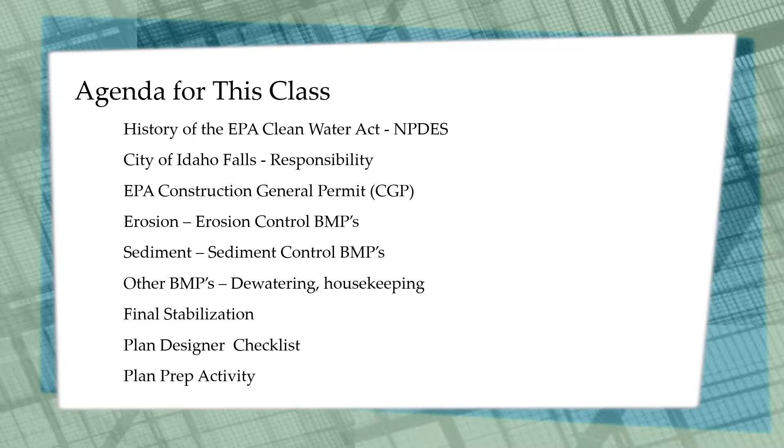Our agenda for this class is to briefly cover the history of the EPA's Clean Water Act and the National Pollution Discharge Elimination System. We'll talk about the City of Idaho Falls and their responsibility as it pertains to the Clean Water Act, and go over the EPA's Construction General Permit briefly. We'll discuss erosion control BMPs, sediment control BMPs, various other BMPs, and final stabilization. We'll look at a plan designer checklist you can use, and do a quick plan preparation activity. Our goal today is to give you tools to design effective and thorough erosion and sediment control plans for your projects in the City of Idaho Falls.

The City of Idaho Falls is required to do their part to minimize polluting of stormwater that discharges to the Snake River. Part of what the EPA requires is that the city have an ordinance pertaining to erosion and sediment control, and enforce those ordinances by inspection. The city doesn't have an option but to abide by the EPA's conditions as they pertain to construction. Failure to meet these requirements by the city is a violation of federal law.

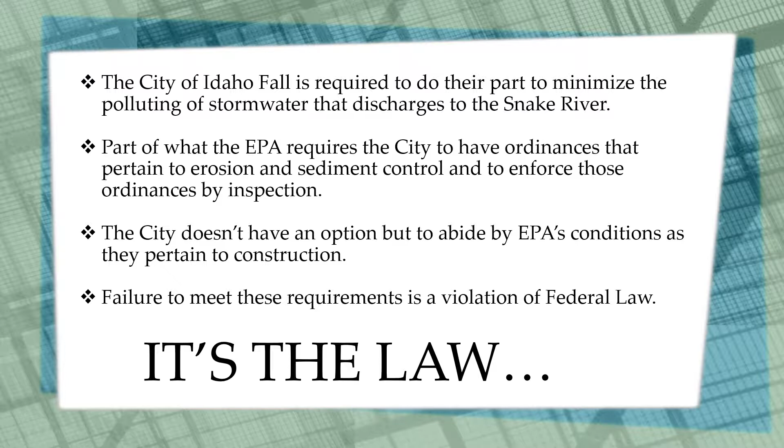So why is water quality important? When sediment load increases in a river, the water temperature increases. As that water temperature increases, aquatic plants die, aquatic insects decrease, leaving less food for fish. High temperatures also mean that certain species of fish can no longer thrive or survive. It also makes recreation less enjoyable.

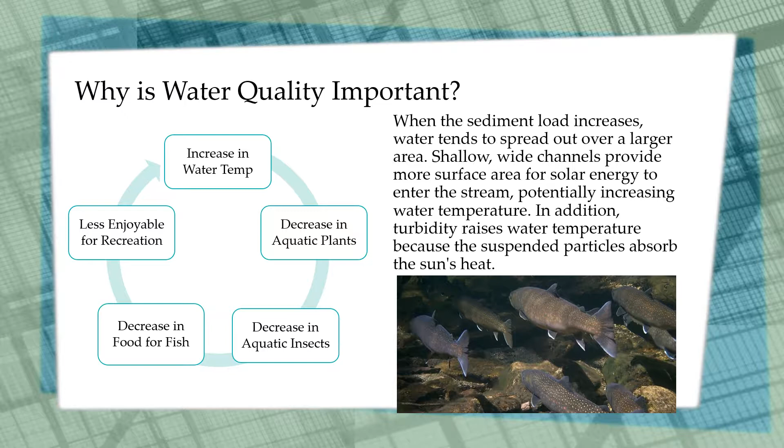So what does this have to do with you? Well, construction is the leading cause of sediment runoff in urban areas.

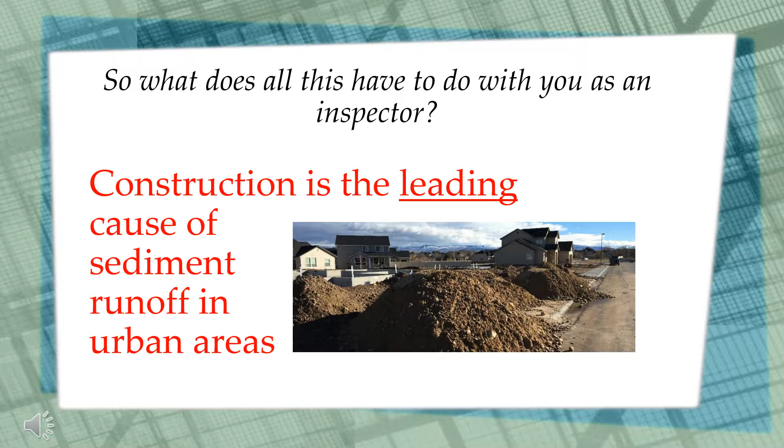The National Pollution Discharge Elimination System is under the EPA's Clean Water Act. The NPDES is over stormwater management for three sectors: construction, industrial or multi-sector, and municipal. Municipal pertains to cities that discharge stormwater to waters of the U.S., such as Idaho Falls. When you're working in Idaho Falls, you are complying with their requirements with the EPA as it pertains to stormwater management.

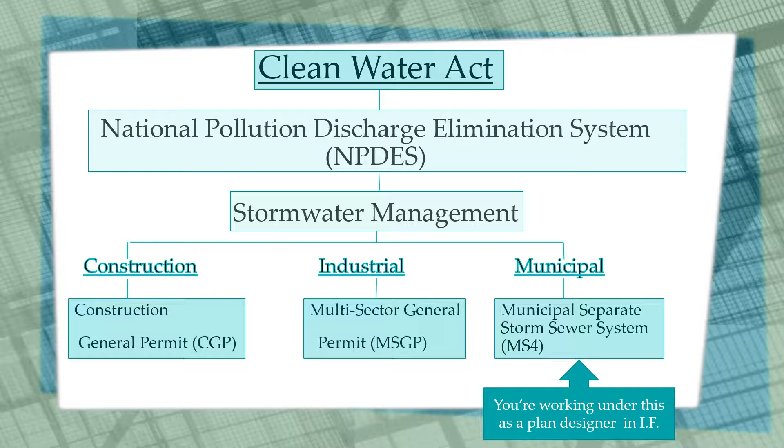Your project may also come under the Construction General Permit if it meets a certain set of criteria. We'll talk about that a little bit later in class.

The purpose of the City of Idaho Falls Erosion Control Ordinance is to protect stormwater, groundwater, water bodies, water courses, and wetlands from construction activities pursuant to and consistent with the United States Clean Water Act. Their goal is to manage and control the amount of pollutants in stormwater discharges, soil erosion, sediment discharges, mud and dirt deposits on public roads caused by or the result of construction activities.

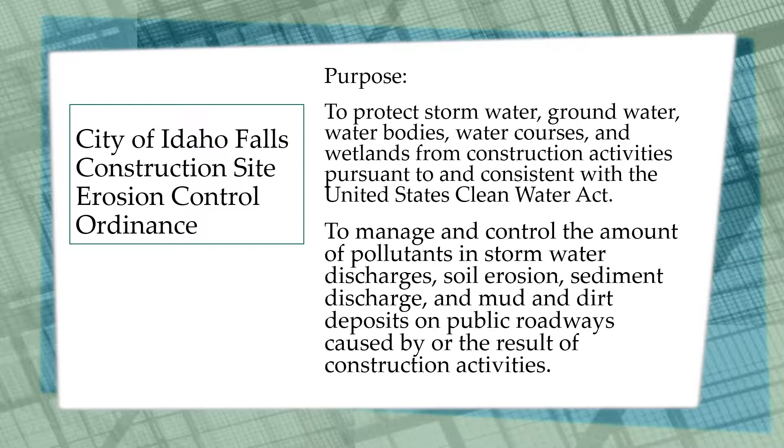The Idaho Department of Environmental Quality has jurisdiction over air quality for the entire state of Idaho. That includes regulating fugitive dust on construction sites. The Idaho State Rule requires that all reasonable precautions be taken to prevent particulate matter from becoming airborne, including dust from job sites.

If a contractor is not doing his part to contain dust on his site, the Idaho Department of Environmental Quality should be contacted. There are consequences for noncompliance. Failure to reasonably control fugitive dust can result in enforcement action, including monetary penalties.

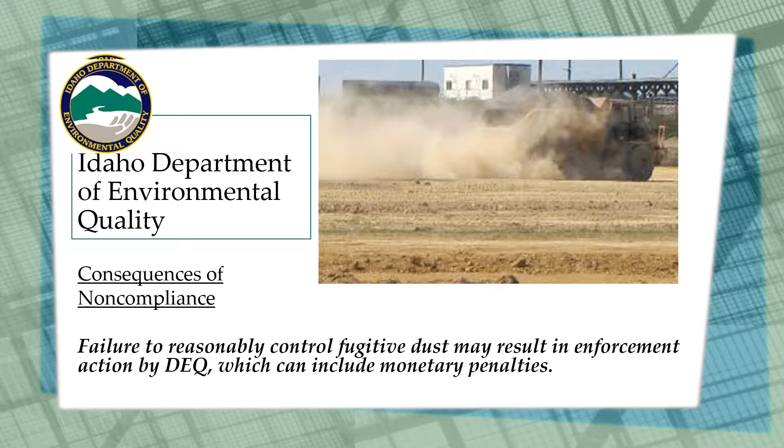As mentioned before, the EPA's Clean Water Act includes coverage over stormwater from construction activities through the Construction General Permit. The EPA's coverage through the Construction General Permit is for any construction project that disturbs 1 acre or more. It also applies to smaller projects that are part of a larger common plan of development. An example of a larger common plan of development would be a subdivision.

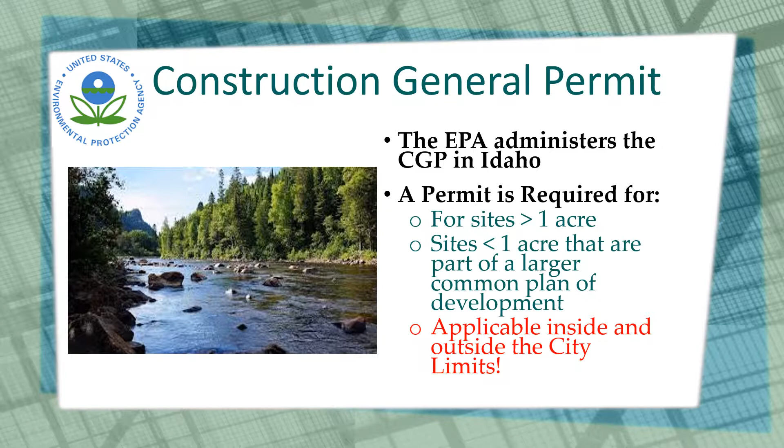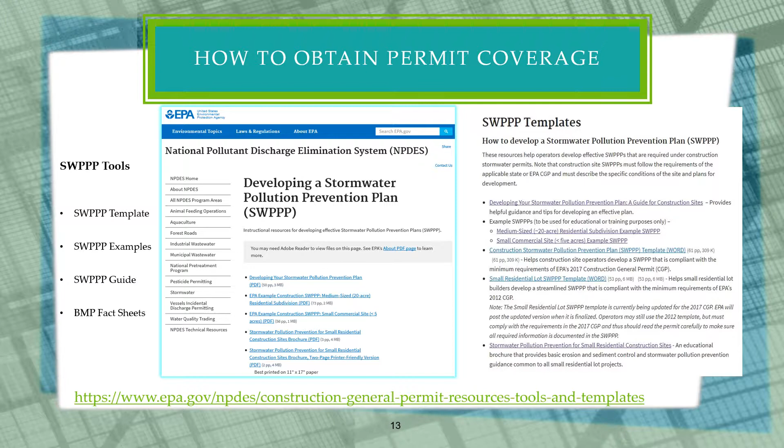The Construction General Permit is applicable inside as well as outside the city limits. If your project falls under the requirements of the EPA's Construction General Permit, you'll need to go to the EPA's website and look under SWPPP, or Stormwater Pollution Prevention Plan Tools. There are templates you can use, as well as example SWPPP plans and guides for preparing your SWPPP for your project.

Here's some important things you need to know. Your SWPPP must be developed prior to submitting a Notice of Intent, or NOI, for coverage on the EPA's website. The contents of your SWPPP will include the sequence and estimated dates of your construction activities.

It'll include a site map or site plan showing where your BMPs are and describing them. You'll have a description of your stormwater controls. You'll need to document your pollution prevention procedures, and document your procedures for inspections, maintenance, and corrective actions if needed for the BMPs you're going to install on your project.

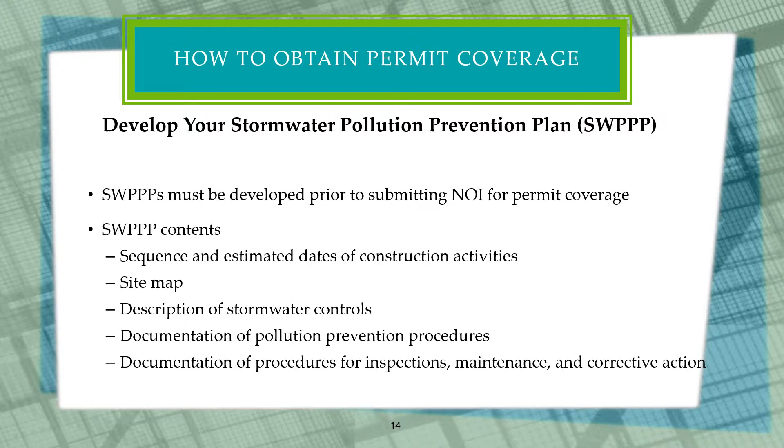Corrective actions refers to any sort of repairs to a BMP that are beyond normal maintenance. Self-inspection is required if your project has coverage under the Construction General Permit, once every 7 days or once every 14 days and after a 1/4 inch rain event.

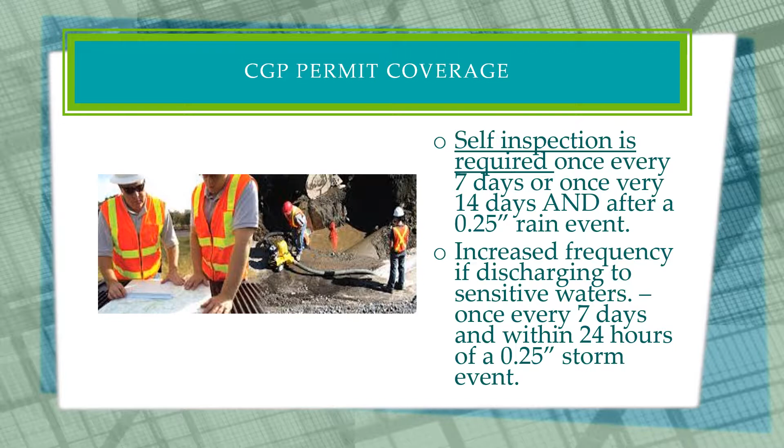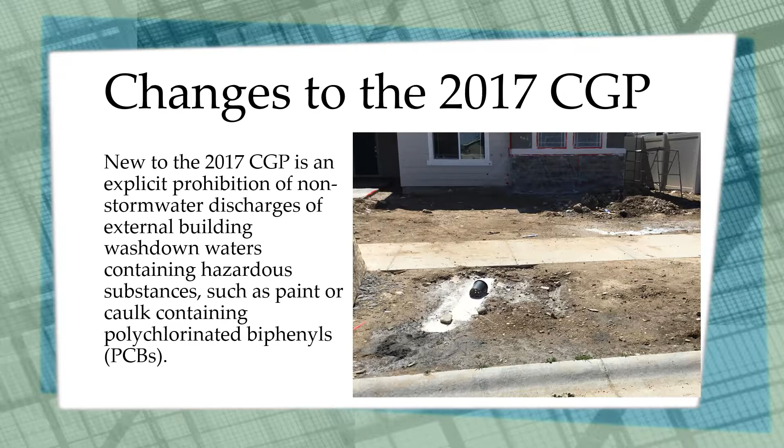The EPA's Construction General Permit is updated approximately every 5 years. The last update was in 2017. New to the 2017 CGP is an explicit prohibition of non-stormwater discharge of external building washdown waters that contain hazardous substances such as paint or caulk that contains PCBs.

Another change to the 2017 Construction General Permit is that construction operators must post a sign or other notice of permit coverage at a safe, publicly accessible location in close proximity to the construction site. This notice must also include information informing the public on how to contact the EPA to obtain a copy of the SWPPP for the project and how to contact the EPA if stormwater pollution is observed in the discharge. Your SWPPP document will need to include instructions to the contractor about this.

Okay, we've completed talking about the federal, state, and local requirements. Now we're going to go ahead and talk about the best management practices that you're going to need to incorporate on your project.

So just what are BMPs, or best management practices? BMPs are the methods, measures, or practices used to prevent or reduce water pollution, including but not limited to structural and non-structural controls, operation and maintenance procedures, other requirements, scheduling, and the distribution of your construction activities.

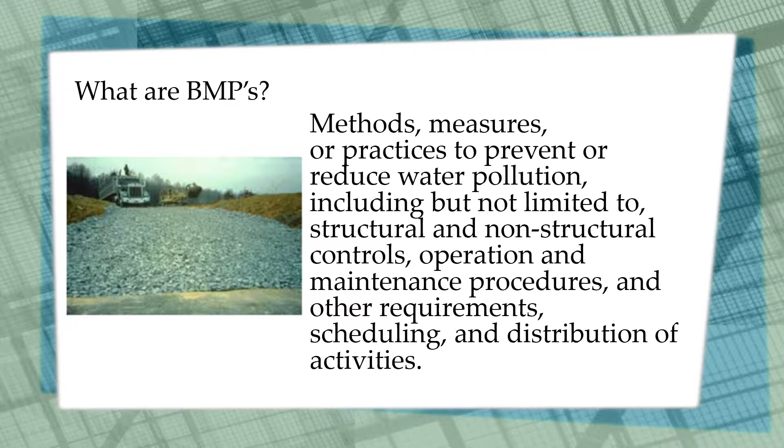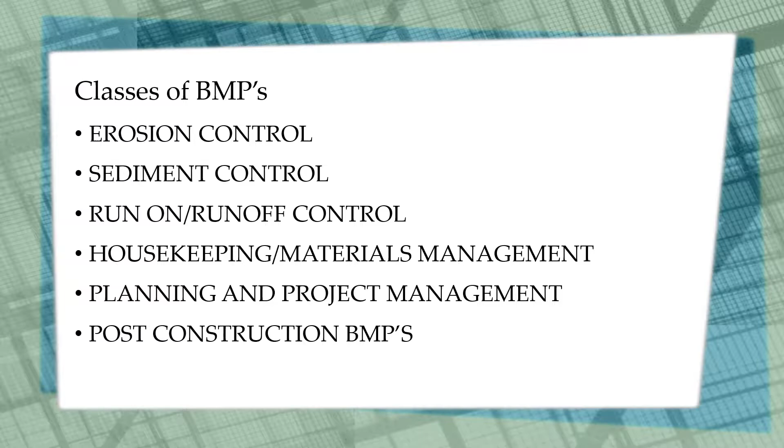The different classes of BMPs include erosion control, sediment control, run-on and run-off control, housekeeping and materials management, planning and project management, and post-construction BMPs. So before we talk about them, let's talk about why we need BMPs.

Erosion control is our first line of defense. If we can keep soil from moving in the first place, then we don't have to clean it up someplace else. Our goal is to prevent water from running across our exposed slopes and surfaces as much as possible, and to try and keep soil in place. If we don't have erosion, then we don't have to clean up sediment someplace else. This is a case of an ounce of prevention being worth a pound of cure.

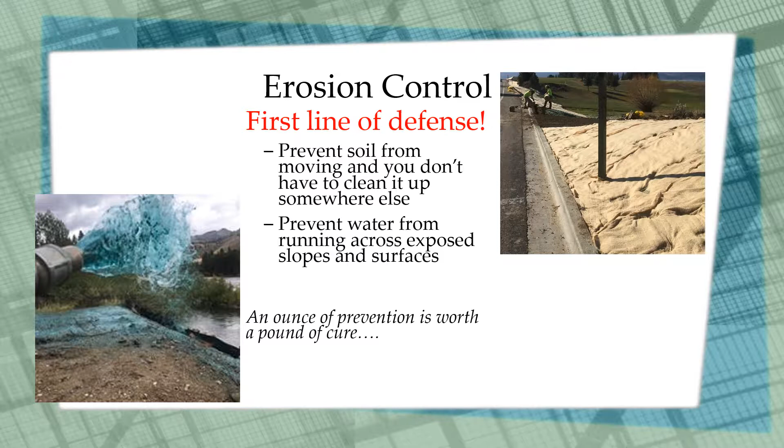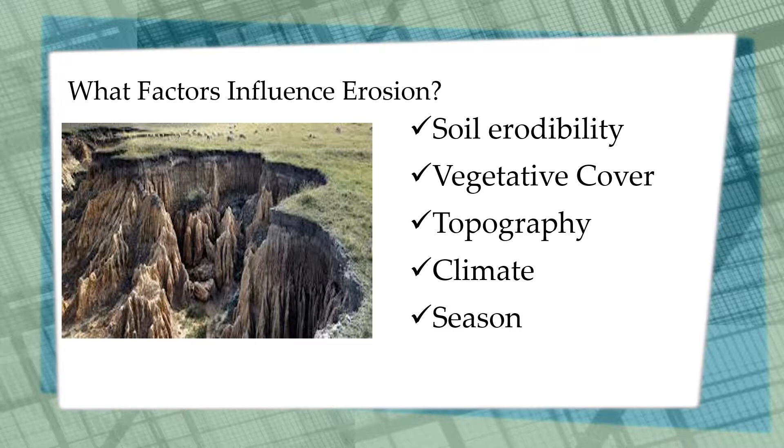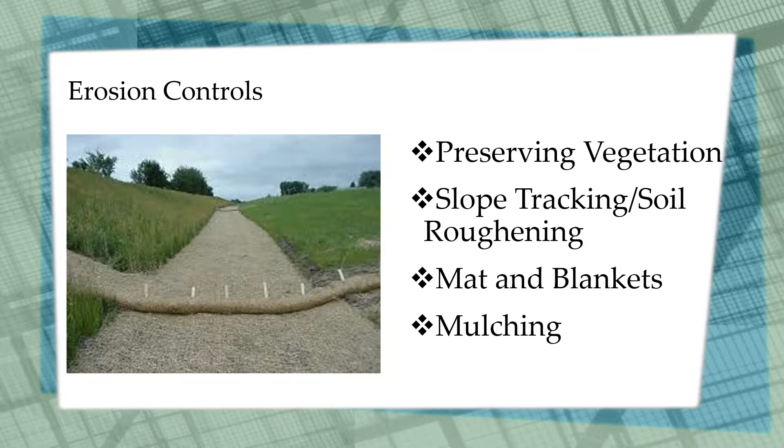Now we're going to cover the erosion controls that you might use on your project. The first one will be preserving vegetation. We'll go over slope tracking and slope roughening. We'll talk about mats and blankets and mulching.

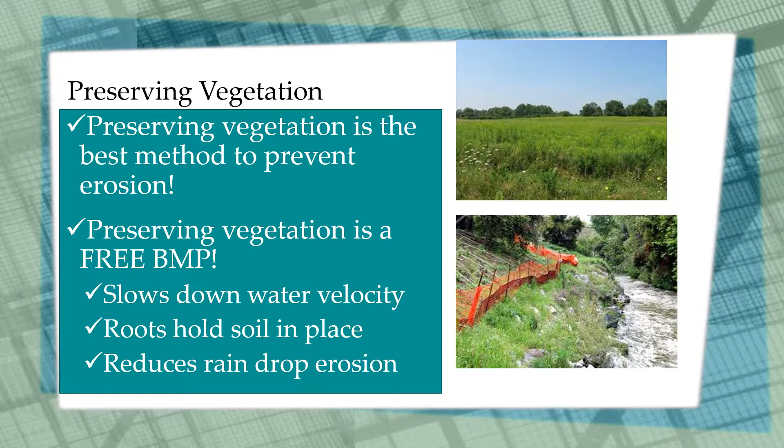The number one thing a contractor can do to minimize erosion is preserve existing vegetation. Preserving vegetation is a free BMP. It slows down the velocity of the water, the roots help hold the soil in place, and it also reduces raindrop erosion. So encourage your contractors to minimize disturbing existing vegetation.

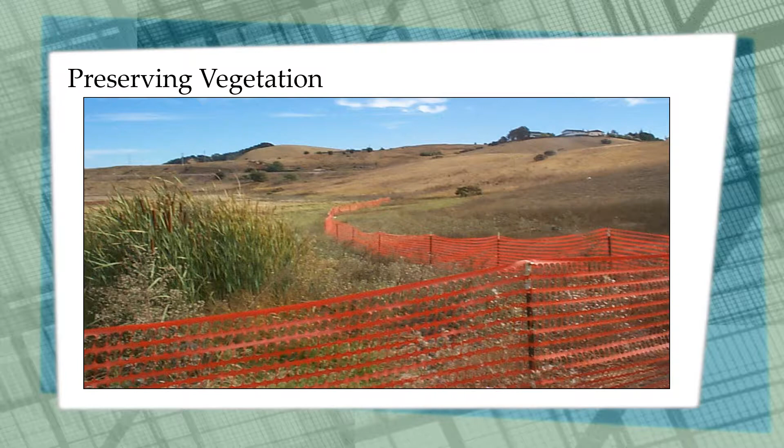Encourage contractors to provide positive protection for areas they want to keep undisturbed. Use construction fence to keep areas from being tracked over, reducing your sediment runoff from construction activities.

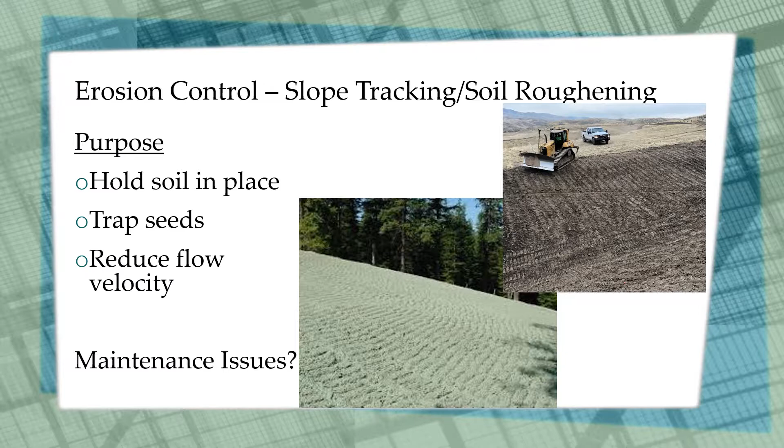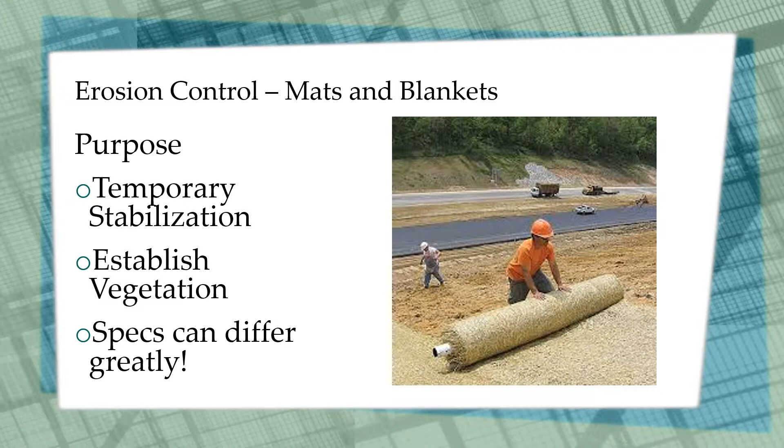The key to mats and blankets being effective is proper installation. Seed beds need to be prepared prior to the mats being installed. The mats must be installed from the top down the slope. The mats need to be staked in well all along the slope, and the mats need to be overlapped sufficiently so that there aren't gaps between them. And the most critical is that the mats need to have a really good contact with the soil.

So the slopes need to be graded prior to the mats being placed. If there are holes or large lumps in the slopes, then the mats, wherever those are, is where soil erosion will take place.

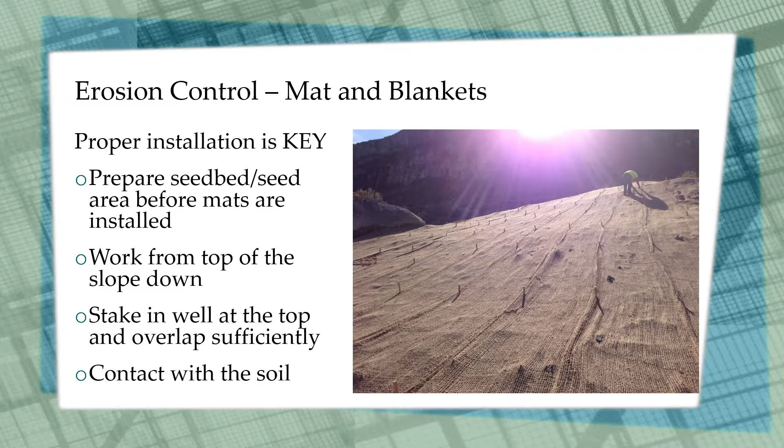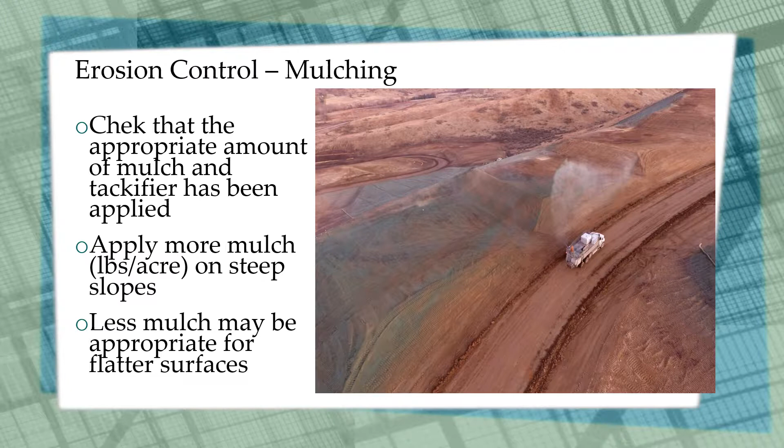Sediment control BMPs include stabilizing your construction entrance, fiber rolls and straw wattles, silt fence, check dams, and inlet and outlet protection.

Relative to erosion control BMPs, sediment control BMPs are generally about 50% effective. Erosion control BMPs are more likely to be 90% effective. Therefore, erosion control BMPs should be your first line of defense.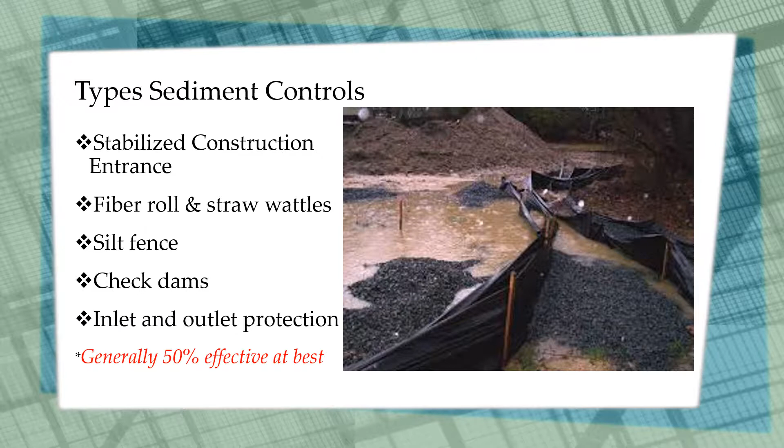A stabilized construction entrance is non-negotiable. It must be required. Make sure that the rock is 2 to 4 inch clean, crushed rock. Round river rock is not acceptable. The depth needs to be approximately 6 inches thick. The width needs to be 20 feet and the length 50 feet. And it needs to be replenished if the rock gets filled with mud.

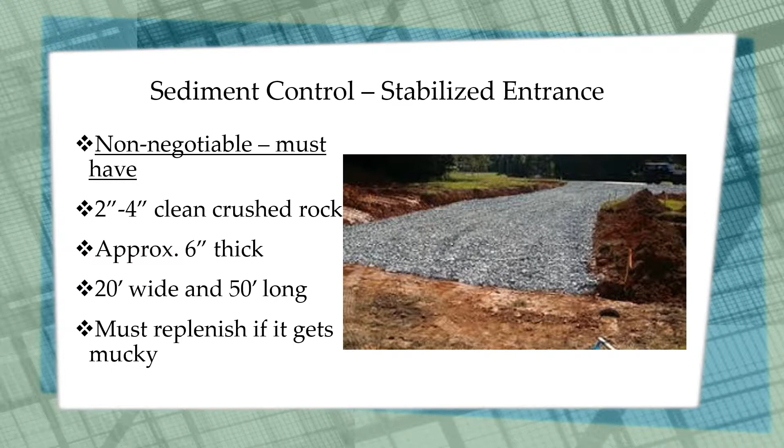As you're doing your inspections, make sure that these dimensions have been met and let the contractor know if the rock gets too dirty and needs to be replenished.

According to the EPA's requirements, track out must be swept the same day. So encourage your contractors to minimize track out, and if it does happen, to clean it up the day that it does.

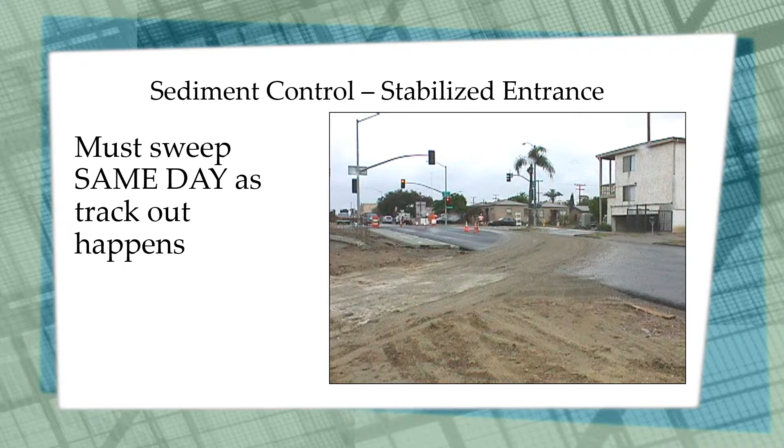Fiber rolls or straw wattles are an extremely versatile tool for sediment control. Their primary function is to slow down water and to trap sediment. They can be used for perimeter control, as shown in this picture. They can also be used along the toe of hillsides, as well as along contours of hillsides.

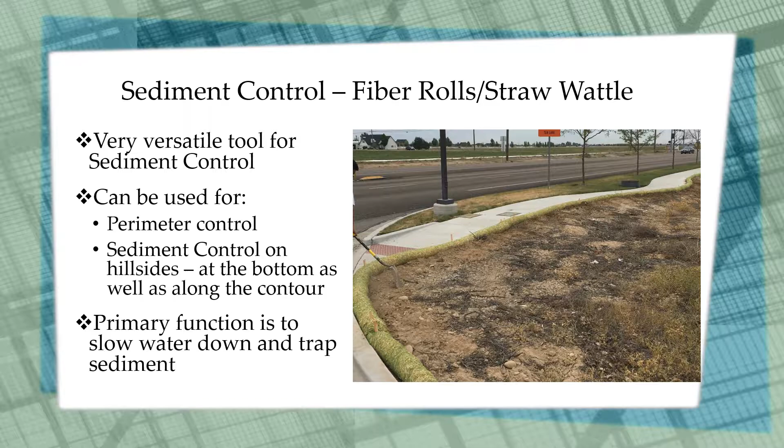Again, always make sure that you install fiber rolls along the contour. Make sure you overlap them sufficiently at the ends where they meet. Make sure you have very good contact with the soil for the entire length of the roll, and make sure that it's staked down properly, typically every 4 feet.

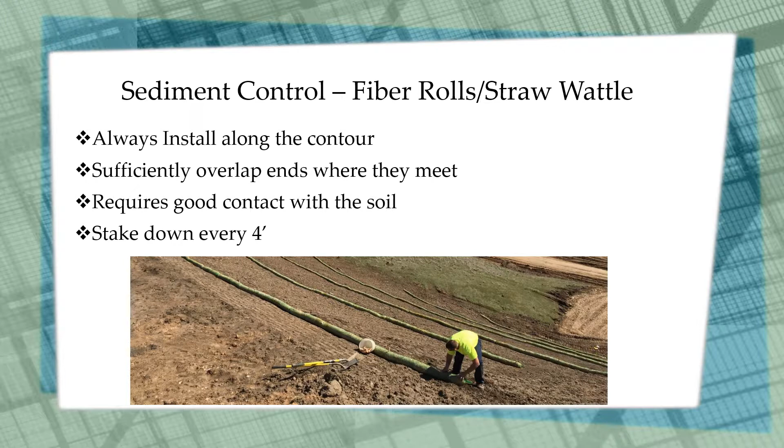Maintenance issues associated with fiber rolls and straw wattles include the fact that they're not very durable. They will need to be replaced if they get broken. Additionally, you'll need to muck out any sediment buildup on the back side of them if there's a storm event.

Fiber rolls are very useful, but their uses are limited. It's generally not very good to use them as inlet protection because they're light and they can float. They can be used as check dams for limited situations, but because they are fragile, they will deteriorate quickly.

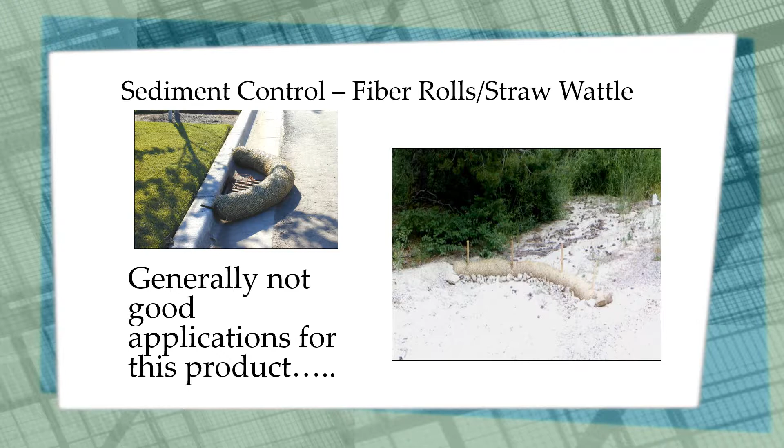Silt fence is probably one of the most common sediment control BMPs used. Silt fence works by ponding water and allowing sediment to settle out. Silt fence is good for use at the bottom of large exposed slopes, as well as a barrier around the bottom of stockpiles.

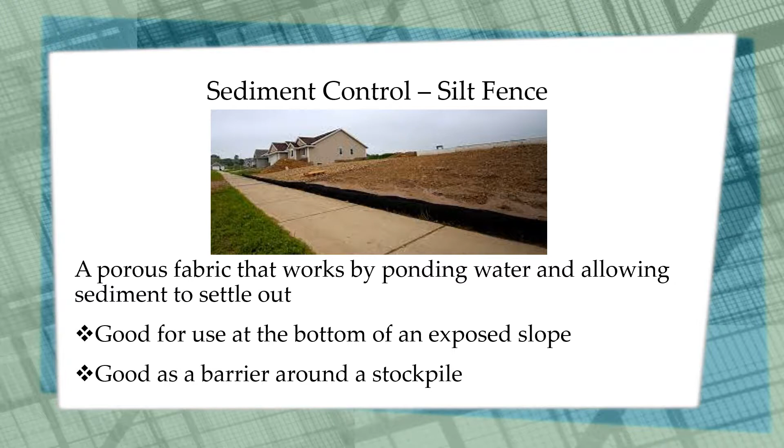Silt fence should never be used in high concentrated flows. It is intended to pond water. Silt fence is absolutely useless if it's installed improperly.

It's also really important that silt fence be installed at the same elevation or the same contour line. Installing it up and down a hill is absolutely useless.

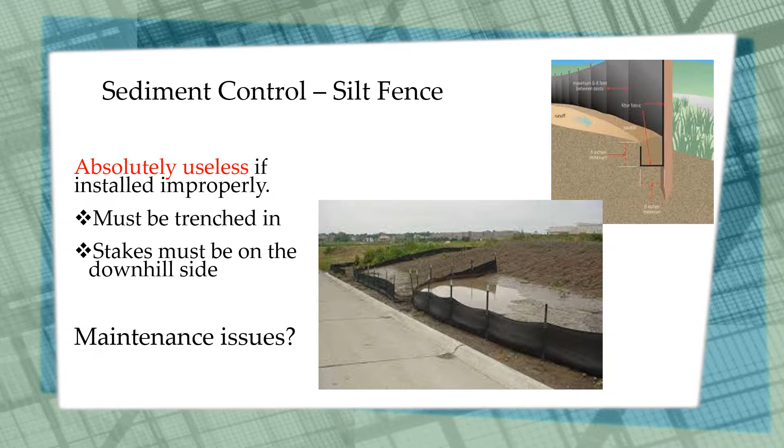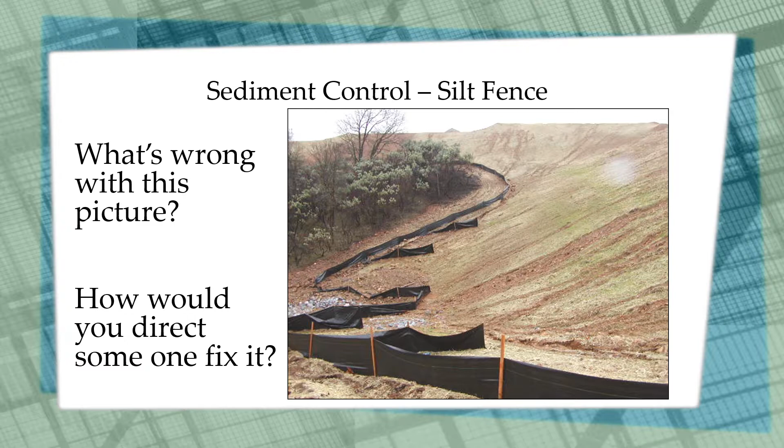On the left, about halfway up the picture, it looks like someone's tried to use the silt fence as a couple of check dams. This is the wrong application for silt fence. Silt fence is not intended to be used in concentrated flows.

Check dams are an excellent sediment control BMP to be used in ditches and swales. The primary purpose of check dams is to slow down the velocity of the water while ponding the sediment behind the check dams.

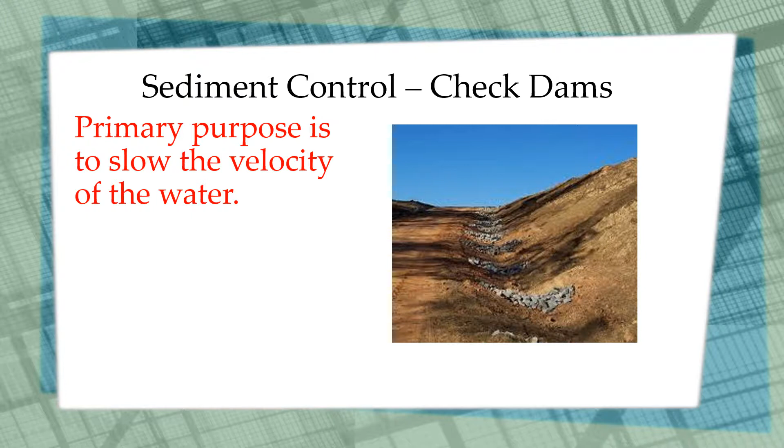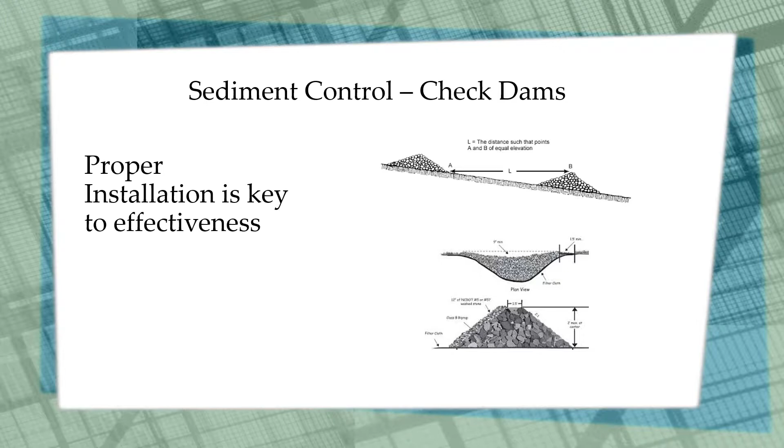Again, proper installation is key for the effectiveness of check dams. The elevation of the toe of the upstream check dam needs to match the elevation of the top of the downstream check dam. Also, the center of the check dam needs to be lower than the sides. Otherwise, water will quickly find a path along the sides and erode them.

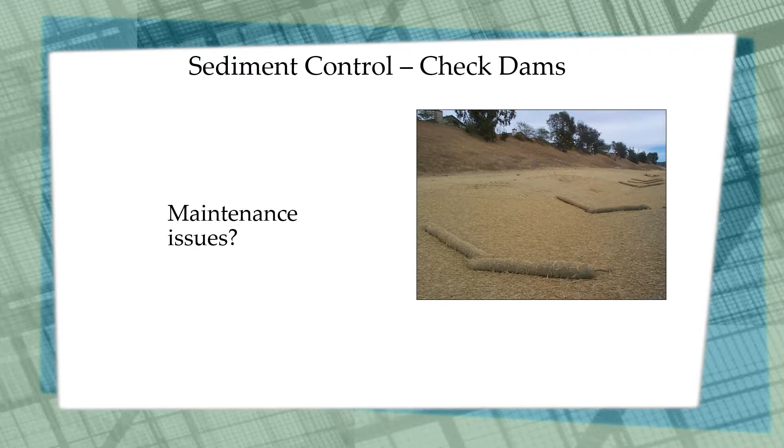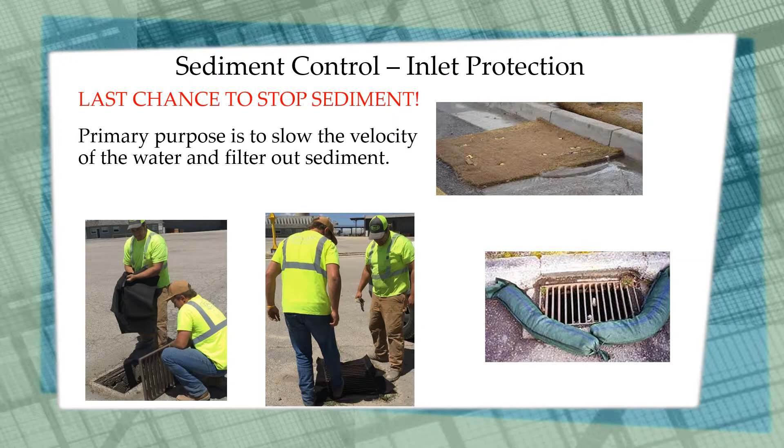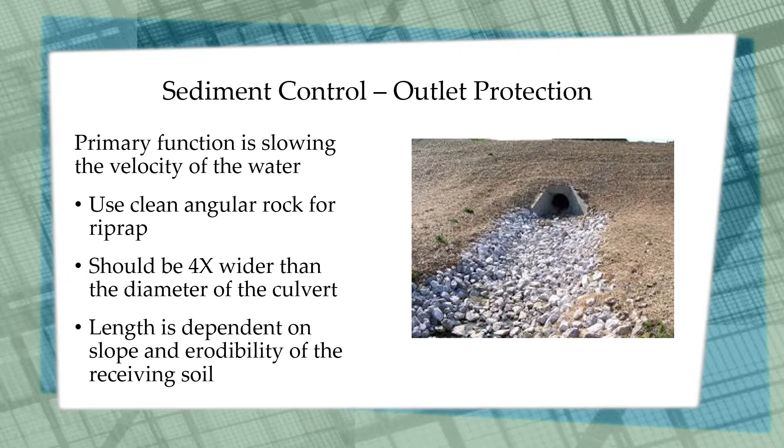If you do see the potential for run-on or runoff, consider diverting flows so that they go around your site rather than through it and picking up sediment. Also, install some sort of device such as straw wattles or a berm to keep water from running off your site, reducing sediment loss.

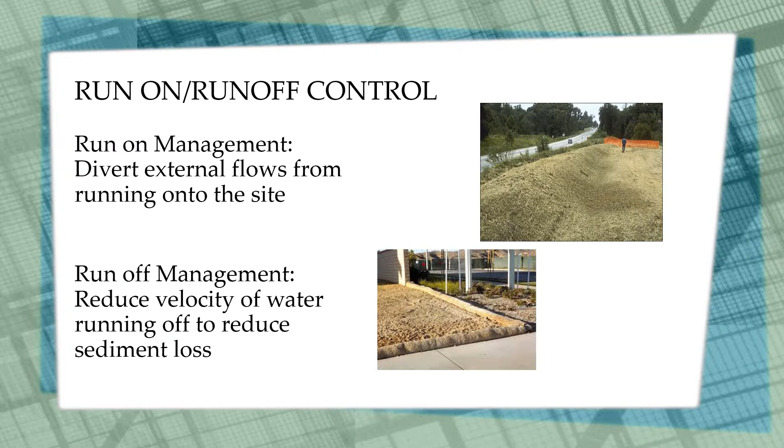Now we're going to move on to our next class of BMPs, which is housekeeping or materials management. This group includes debris containment, dust management, storage and proper disposal of toxic materials, and stockpile management.

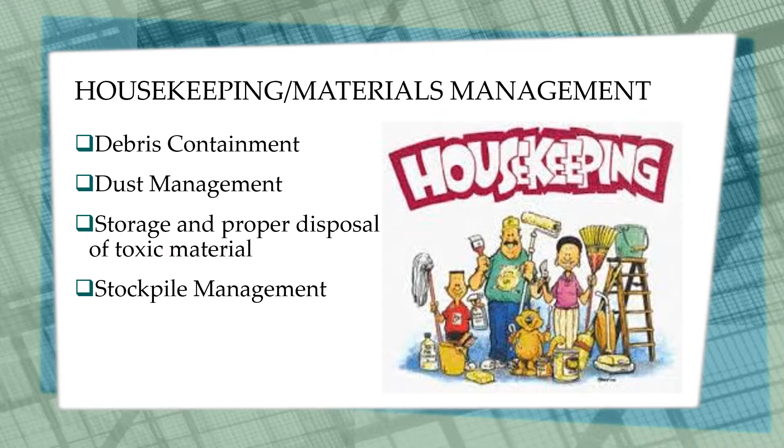Debris management is a big part of keeping a job site clean. Check to see whether or not the site has a debris container. Check to see that the size of that container is adequate for the project. If there's garbage overflowing, let the contractor know that he needs to have it regularly serviced. The new construction general permit states that all debris containers will be covered when not in use. This may not be practical all the time, but the contractor should have a way of covering his debris container if it's needed.

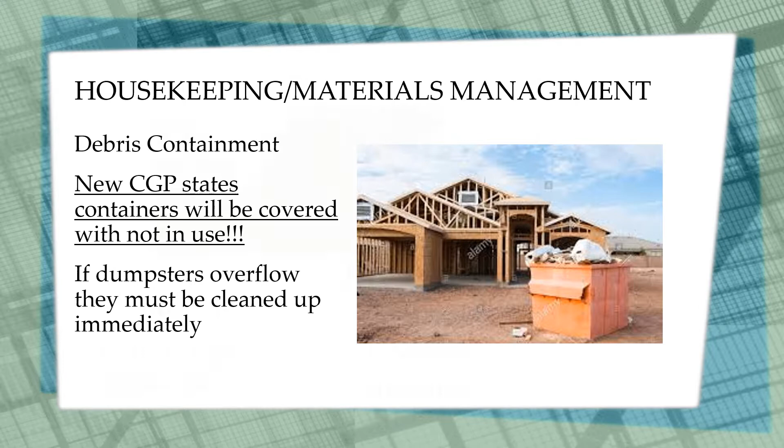Dust management is really critical for our job sites. Why is dust regulated? We have a lot of very fine silt particles in Idaho. Those silt particles are comprised of silica or glass. So the dust in our air is basically fine, tiny, sharp pieces of glass, which is extremely hazardous. As those fine particles are inhaled, they penetrate deep into lungs, causing lung diseases. They can affect people with impaired lungs as well. Not only is it a health risk, but it's also an air quality issue, and it's a nuisance. Make sure you specifically mention dust management when you're preparing your erosion and sediment control plan.

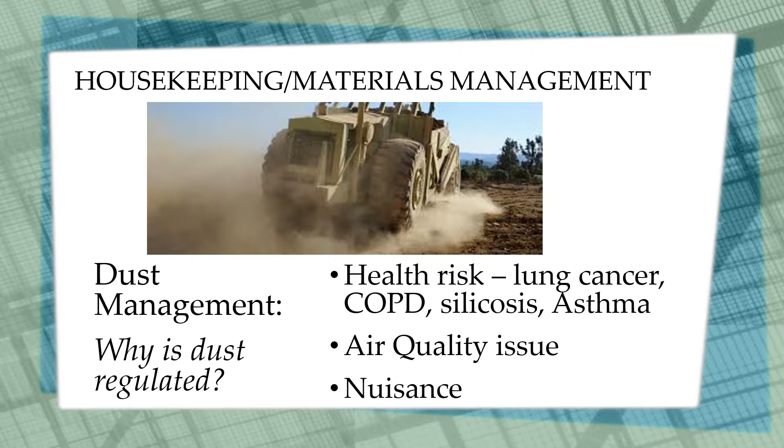Storage and proper disposal of toxic materials is often overlooked on job sites. If you see on a job site that there are toxic materials, let the contractor know that they need to be stored in a leak-proof container.

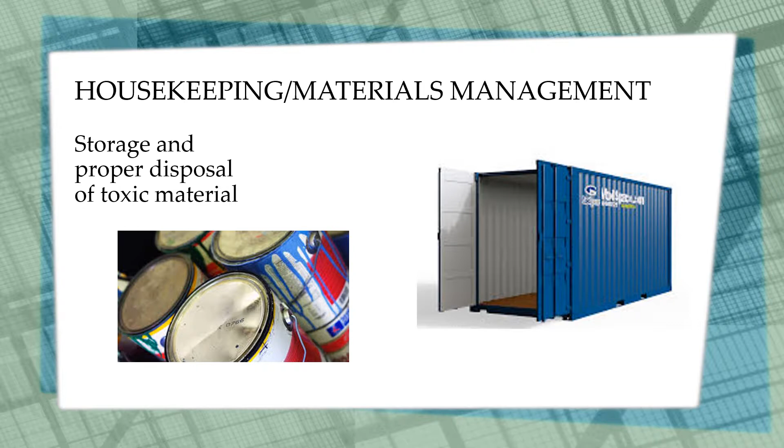Oil is considered a toxic material and needs to be stored properly. If a vehicle does require maintenance, make sure that the contractor uses drip pans or some sort of pads underneath the equipment while the maintenance is taking place. If there is a spill on site, direct them to clean it up immediately and dispose of that material properly.

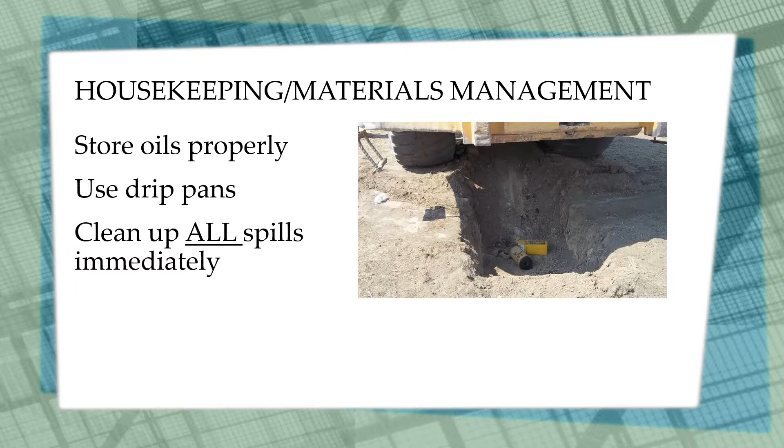Concrete washout is extremely toxic to any kind of aquatic plants or animals. Concrete washout must be stored in a leak-proof container. This can be as simple as digging a pit and lining it with visqueen and surrounding that with bales.

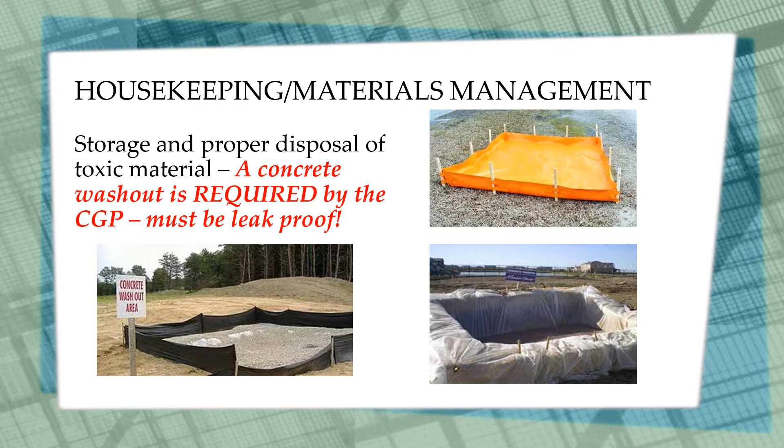When you're doing your inspections, make sure that the concrete washout is lined. It also needs to be signed very clearly so that subcontractors will use it. When you're putting your erosion and sediment control plan together, make sure you designate a spot for concrete washout and show a sign for it so that it's clearly marked and visible.

During your inspections, make sure you check to see that the porta potty is staked down to protect it, and make sure it's not placed anywhere near a curb and gutter or storm drain inlet. Check to make sure that the contractor has a spill kit on site, as that is required by the EPA's Construction General Permit.

Encourage the contractor to avoid fueling and maintaining vehicles on site if at all possible. Also remind them that they need to sweep their construction entrance daily to make sure that track out is not an issue.

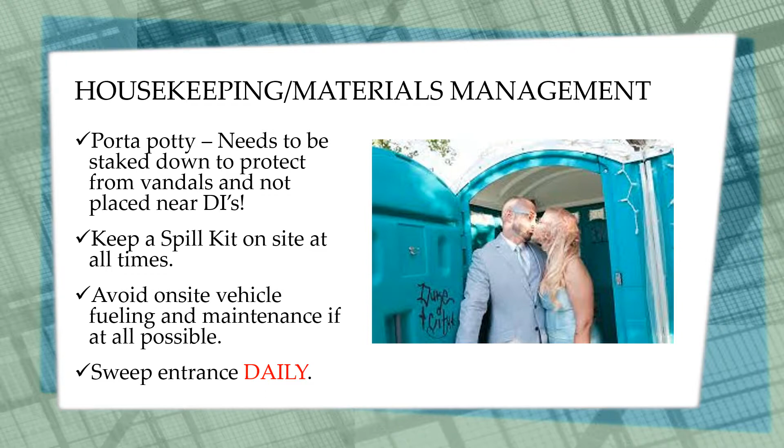Let your contractor know that illicit or illegal discharges are a big thing to the Environmental Protection Agency. An illicit discharge is defined as any discharge to the MS4 or storm drain system that is not composed entirely of stormwater, except for those discharges that are allowed under an EPA permit.

Allowed discharges are limited to fire hydrant flushing, landscape irrigation, wash water that doesn't contain any kind of soap, solvents or detergents, water used for dust control, and water used for flushing water lines.

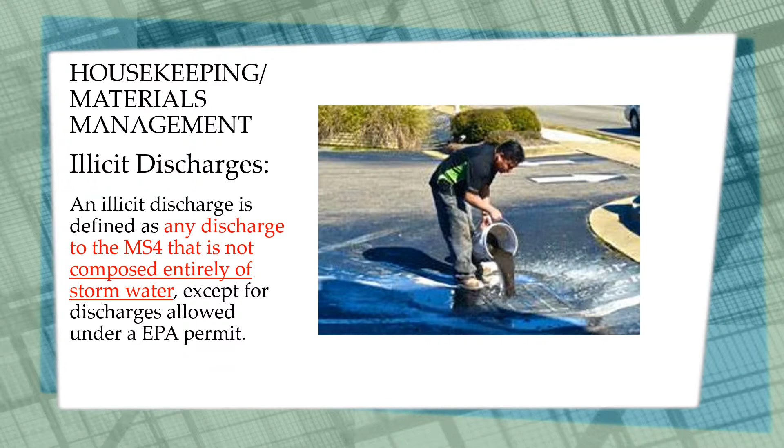Next is stockpile management. If a stockpile is going to be sitting unused for 14 days, it must be stabilized. That can be done through a variety of methods, either covering it with a tarp, mulching it, putting on temporary seeding, or applying straw and a tackifier. There's a lot of possibilities. But again, the critical thing is that it be stabilized if it's going to sit unused for more than 14 days. For dust control purposes, the top of the stockpiles should be flattened.

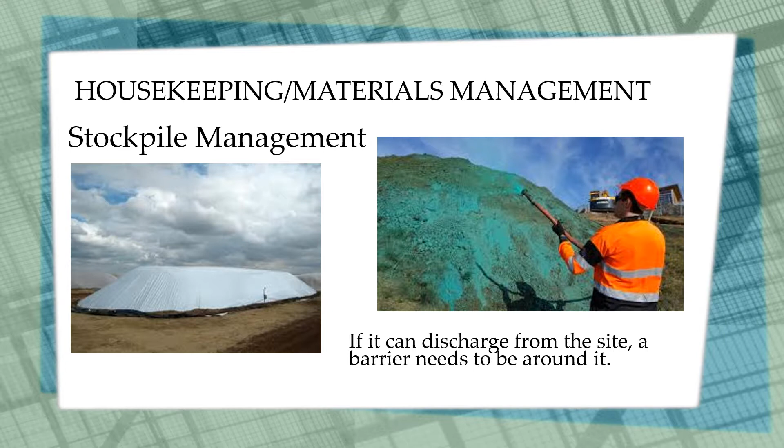When construction is getting ready to start on a project, talk with the contractor about how to phase the project to minimize exposed soils. Also, if there's going to be dewatering during the project, make sure that dewatering plan is included with the erosion and sediment control documents approved by the city.

If it was unknown at the time of the start of the project and it suddenly becomes an issue during construction, have the contractor stop and submit a dewatering plan for review and approval before they start work.

If the contractor is going to be dewatering into any kind of surface water, such as the Snake River or any other surface water, make sure they understand the requirements of the construction general permit. Turbidity monitoring is required by that construction general permit if dewatering to surface water is going to be done.

If you're not comfortable with preparing a dewatering plan on your own, find someone who is familiar with it to assist you. Make sure the contractor understands that they can't start dewatering until the dewatering plan has been approved by the city, as well as the EPA if you fall under the construction general permit guidelines.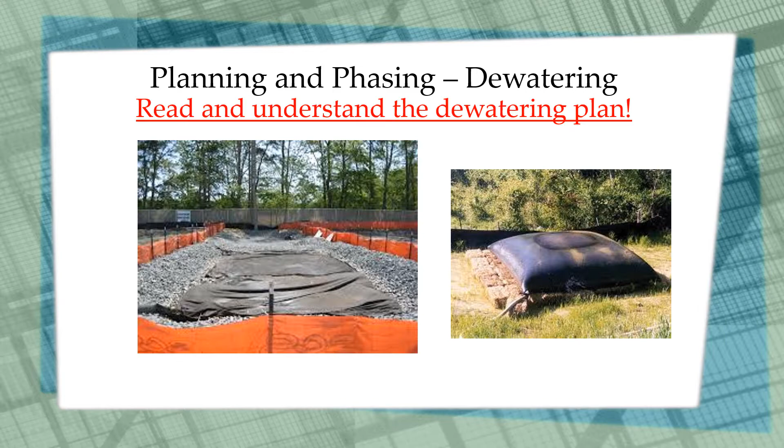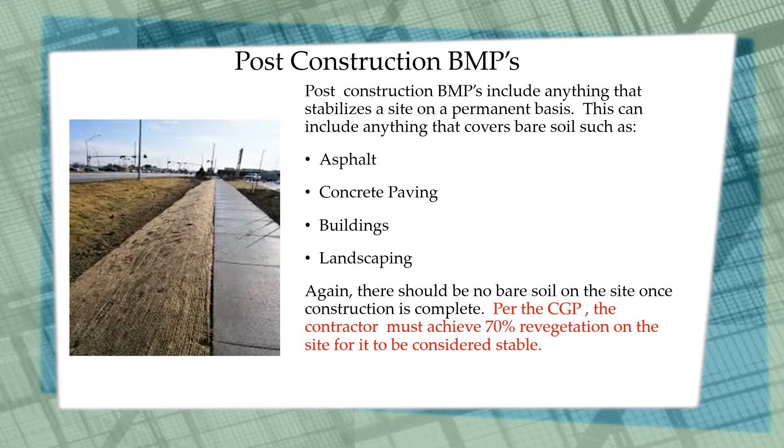Remind your contractor during the construction project that one of the best BMPs they can use is achieving final stabilization through revegetation. Encourage them to seed or sod any of the areas that have been final graded. Once you get to the end of the project, make sure that they understand that 70% revegetation requirement.

The other option is to have them use temporary erosion control measures along with seed to achieve that 70% coverage. Temporary erosion control measures can include straw blankets or mats and wattles, and also placing a tackifier and mulch over that seed.

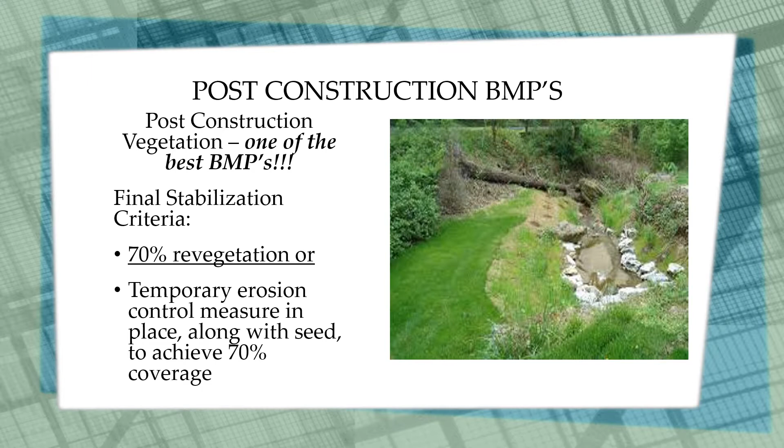Your role as a plan designer is a big one, as the contractor is going to be looking at your plan to minimize sediment during construction as well as after construction.

One of the best things you can do is start by performing a site assessment. Look for potential locations for runoff onto your site, as well as places where water could discharge off of your site. Identify surface waters within the vicinity of the project. Look at locations of discharge and any kind of proximity to waters of the State, even storm drains, as often they go directly to rivers and lakes.

Evaluate your site for types of temporary BMPs that you're going to need. Consider final stabilization measures that you're going to need to use given your soil conditions, topography, weather, etc.

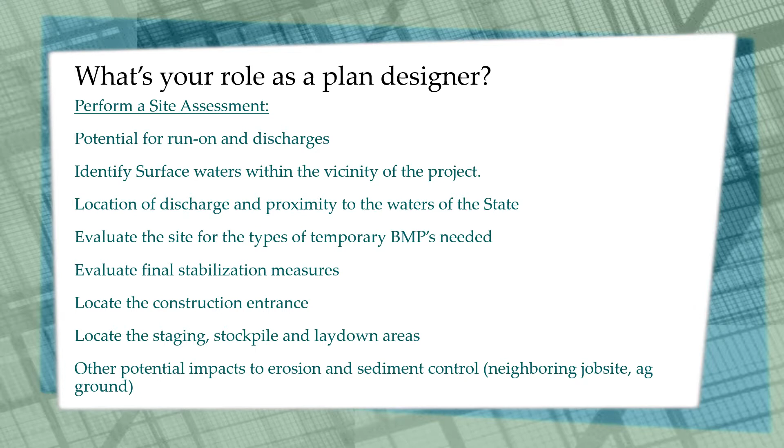Look at where the best location will be for that construction entrance. Locate your staging area, potential stockpile and laydown areas too, understanding that the contractor may choose to move them if necessary. And then also look and see if there's any other potential impacts to erosion and sediment control, such as possibly a neighboring job site, or maybe agricultural ground that's near you.

Identify sources of pollution associated with the specific project that you've designed. What are the potential contaminants from this work? Do you have paint, drywall, concrete, stucco, solvents?

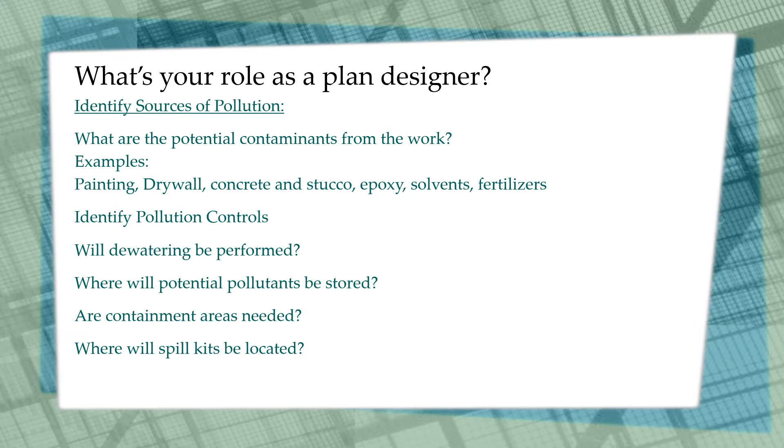Identify pollution controls that you're going to need to use given those sources. Will dewatering be performed? Where will potential pollutants be stored? Are containment areas needed? And where will a spill kit be located for this project?

As a plan designer, some additional responsibilities will involve project administration, such as documenting the project estimated start and end dates, and documenting any sort of phasing that will take place during the construction.

Also, if the project is covered under the construction general permit, you'll need to identify who will be responsible for submitting the notice of intent to the EPA, performing some inspections, and maintaining the BMPs. You'll need to outline the inspection schedule and how rainfall will be tracked. Identify seasonal windows for establishing vegetation, and identify if there are any additional permits that affect the plan or the project.

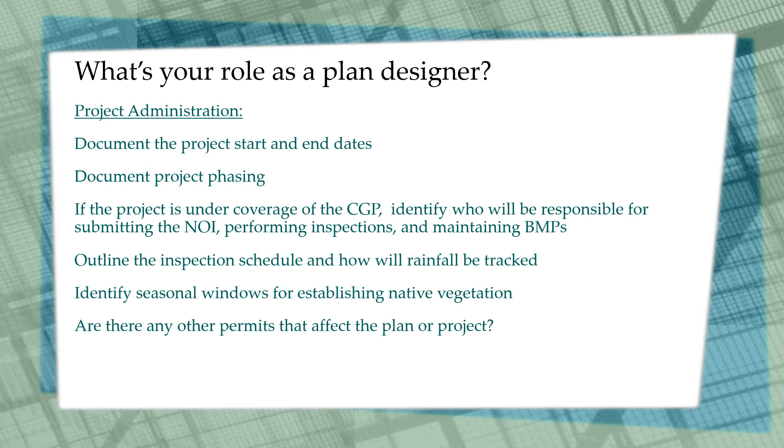Here's an example of an erosion control plan preparation checklist that you could use when preparing a plan for the city of Idaho Falls.

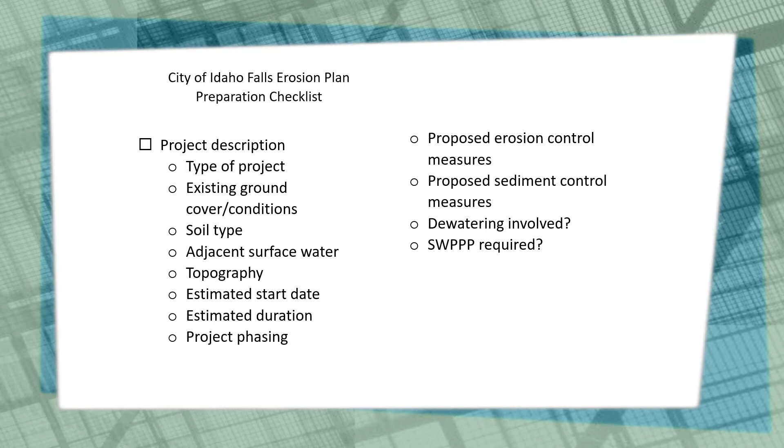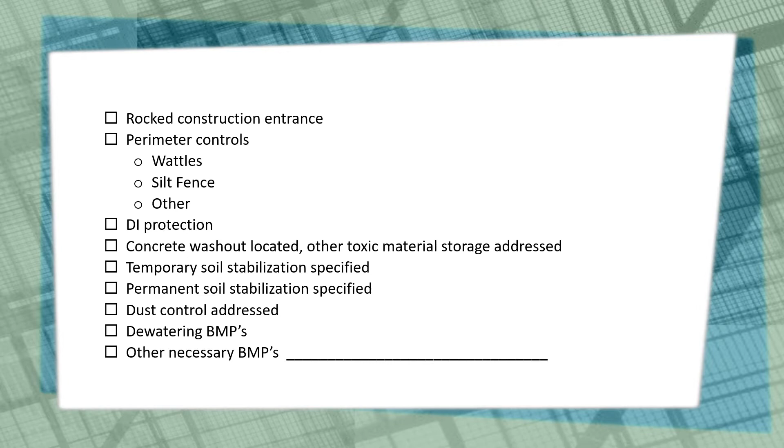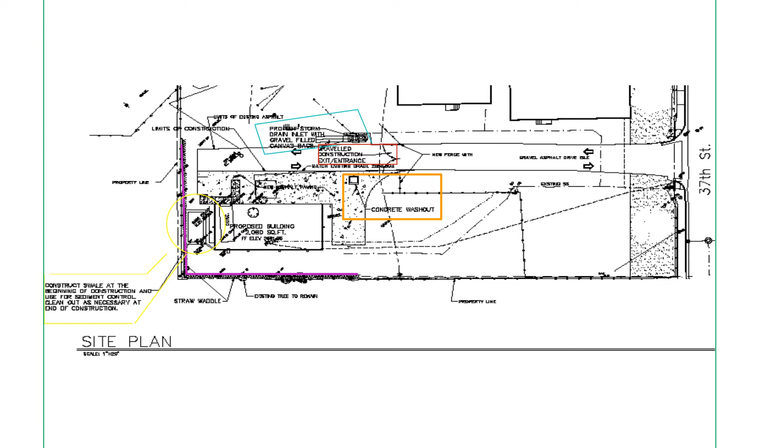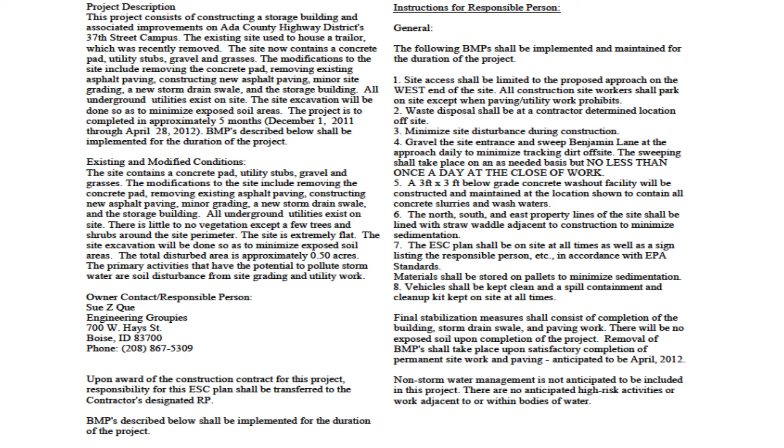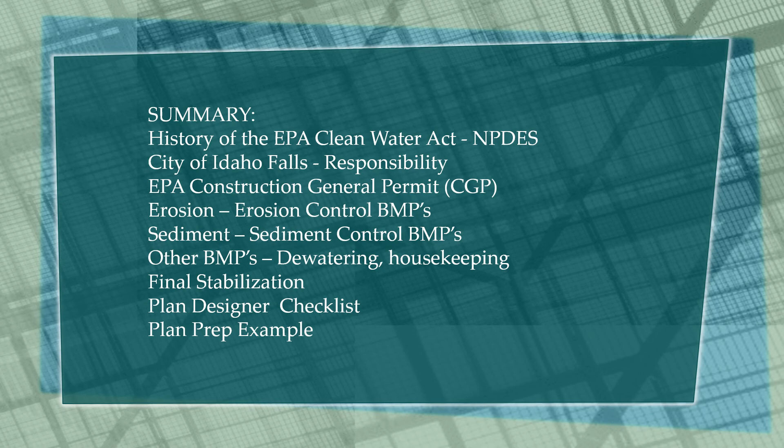I hope this presentation is giving you some tools for you to use as you put together your erosion and sediment control plans for the City of Idaho Falls. Thank you.